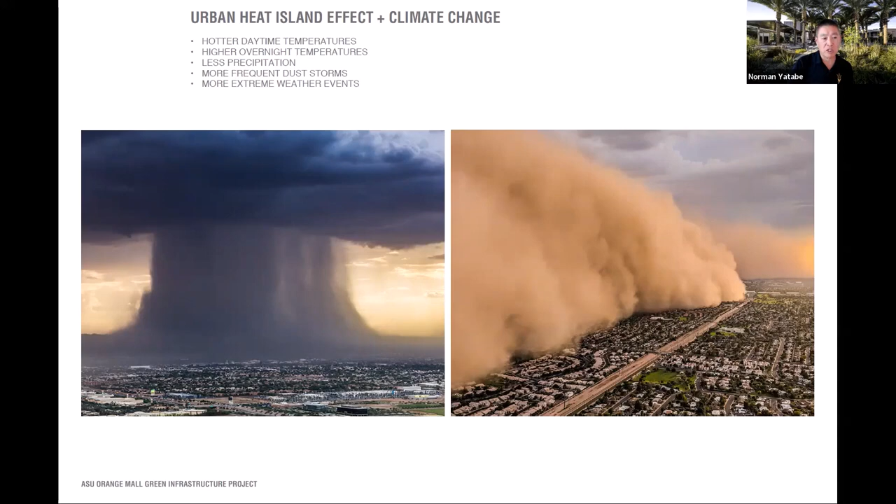So to address the negative impacts of climate change, ASU has committed to leading the world by example and has established a series of sustainability goals, which in essence permeate all aspects of university life. To meet these goals, our approach includes advancing sustainable technology and research, converging the university's mission with its operations, raising awareness of climate change and resource depletion, and learning from the practice of implementation.

And two examples of that are our Campus Harvest program, which addresses our food connection goal.

There's two parts to it. One is the date collections and citrus collections from our on-campus palms and citrus trees. In terms of staff and faculty involvement, we extend participation and interaction by staff, faculty, and students in all aspects. What you're seeing here is our grounds operations and students and staff participating in zero waste events and some of the food harvest collection.

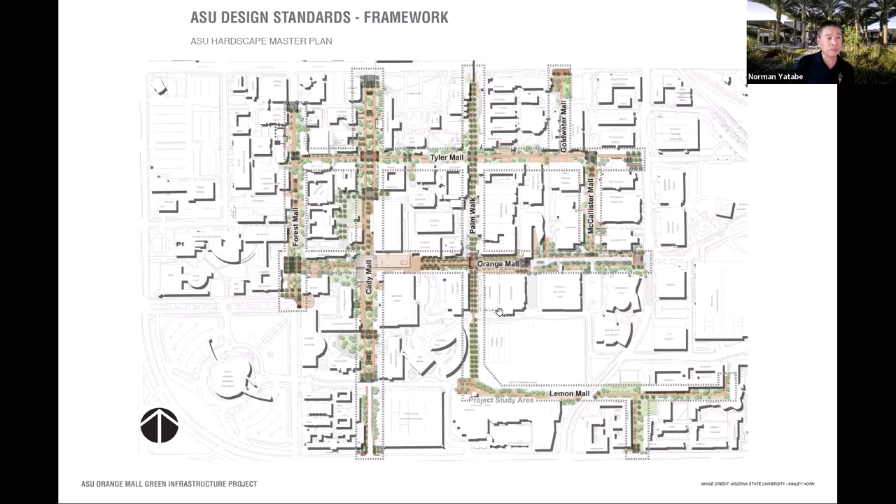In 2016, the Student Pavilion project was created to house all student government and student group activities into one building in the heart of campus. The goal was to achieve LEED Platinum and make it also ASU's first net zero energy building. We also saw this as an opportunity to address the area in front of Student Pavilion. This is just context: middle of campus, Student Pavilion, and Orange Mall.

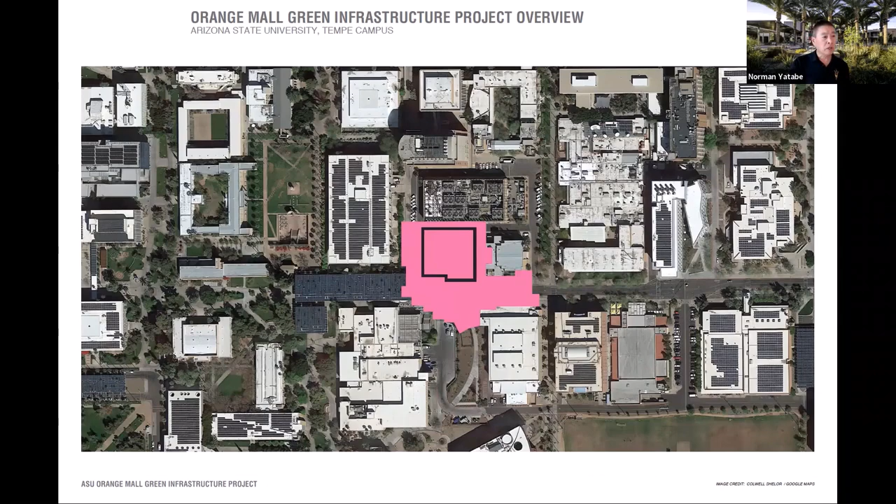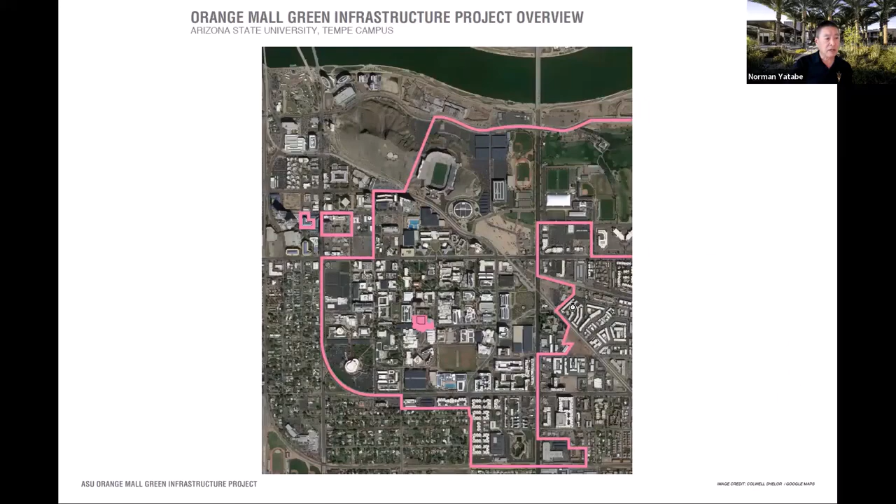We used Orange Mall as the first implementation of our hardscape master plan. We essentially had two projects working in one project area with two different consulting groups. One, the Student Pavilion, was led by Weddle Gilmore as the prime architect, and Orange Mall was led by Allison's group as the prime landscape architect. With that, I'll pass control over to Allison to talk about the project specifically.

All right, thanks Norman. The stakeholder engagement process was really well attended by the students, and the desires for the building and the corresponding outdoor spaces were integral to the development of the larger section of Orange Mall. Over half of the top 20 desires included goals for the outdoor spaces or about the creation of indoor-outdoor spaces that jointly met the goals.

One of the largest challenges of this project was the location, because the site is in the middle of the heart of campus, next to the library, the student union, lecture halls. Around 12,000 students and faculty walk through the site each day. During the hotter times of the month, the pavement can be over 130 degrees Fahrenheit. It's really hot, and there wasn't a lot of shade. As the campus is densifying, a lot of the outdoor spaces are being taken up with larger footprints for the building and taller buildings.

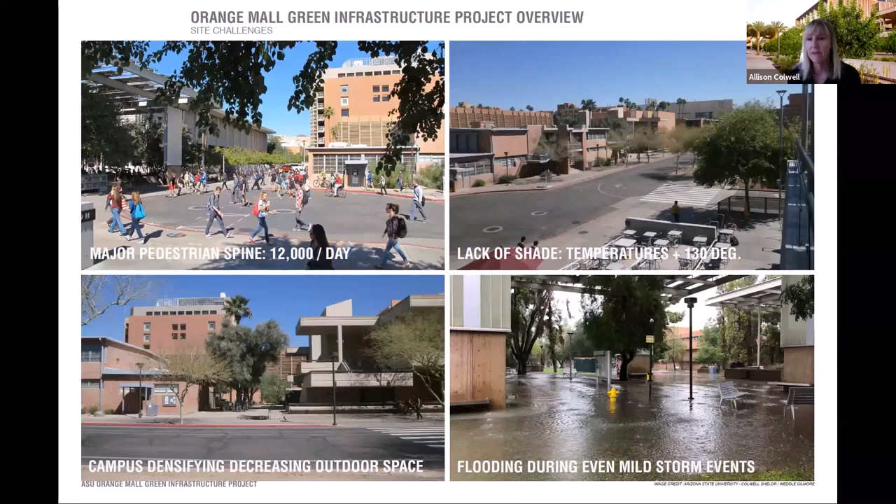Even during just mild flooding or storm events, the buildings around this area would experience flooding. It's interesting that just a couple of storm events each year, the few times that it rains, it really pours, but those couple storms make up that 7.7 inches that Norman was talking about. So there were other challenges to the site: many utilities and really shallow duct banks. We found out very soon that we were going to have challenges getting the water across the site with these shallow utilities.

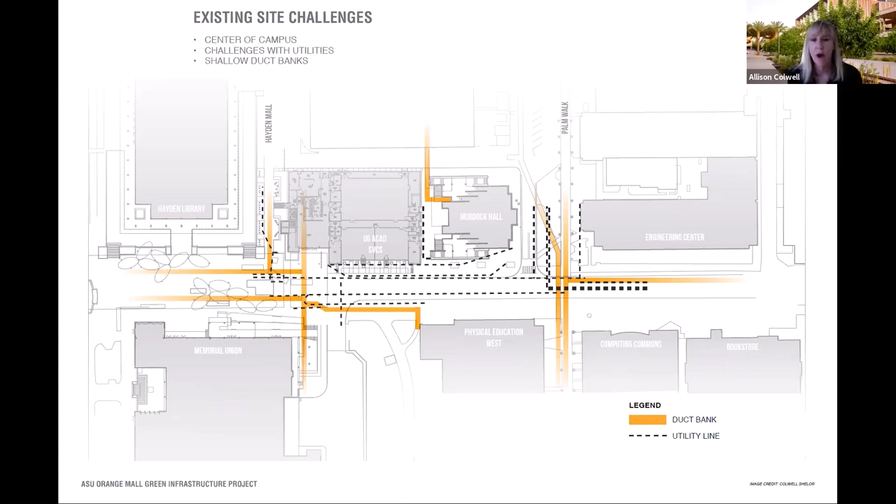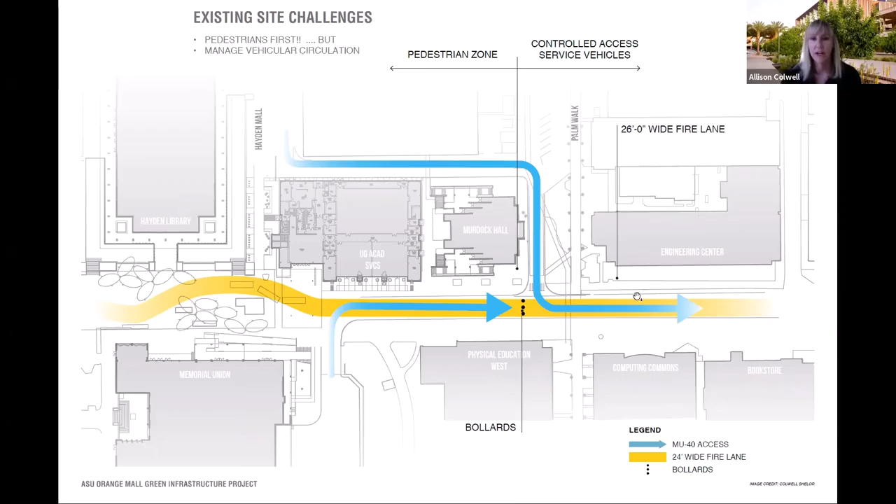The design priority was pedestrians first. However, we needed to accommodate a 24-foot fire lane right through the middle of the site, as well as a loading dock that needed to access through the site for large trucks. The central plant is in this area here, and the trucks needed to kind of get around the building from the central plant.

Taking all of that into consideration, plus the student feedback, the project goals of the landscape were to first prevent flooding in adjacent buildings during our monsoon season, mitigate the microclimate to maximize comfort and use, provide social space to reduce student stress, create flexible event space as a social amenity, create a perceivable educational living laboratory, support ASU's position on global sustainability, and achieve sustainable site certification.

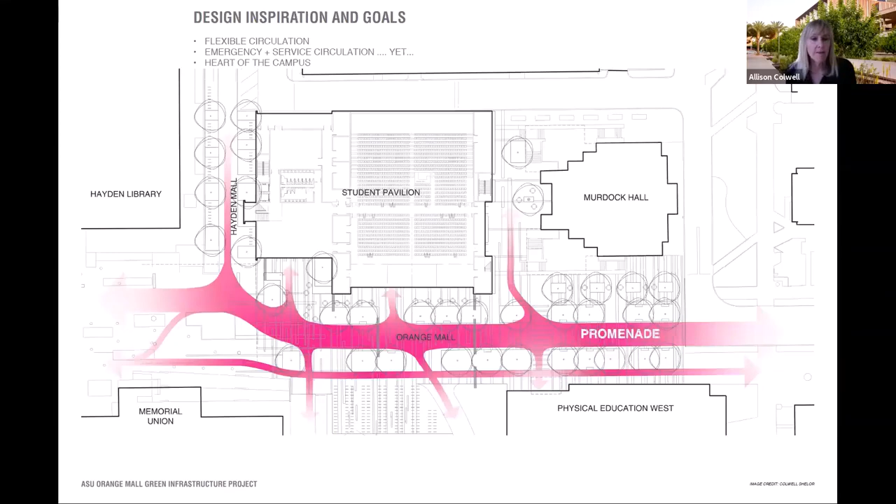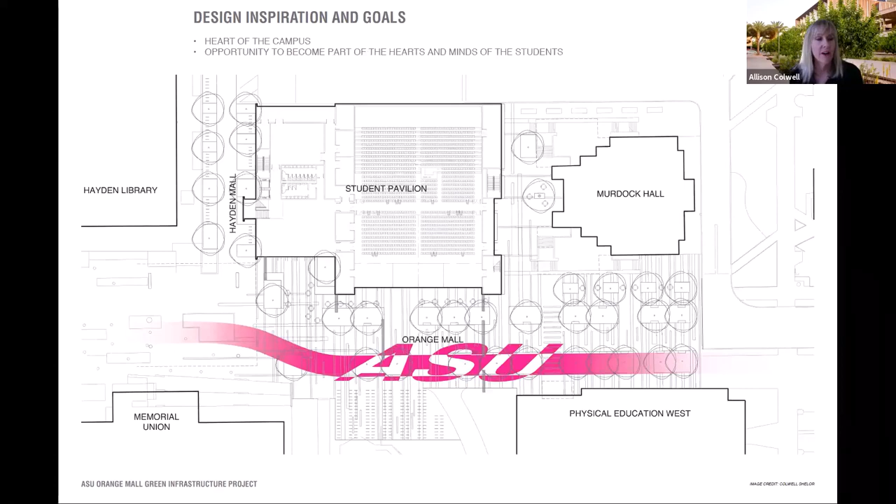By creating a dominant promenade through the site connecting to all the other highly used buildings, we saw an opportunity to create a space that transforms the heart of the campus into a green heart, part of the brand of ASU with living laboratories front and center. The renovation transforms the asphalt paved vehicular roadway into a shady pedestrian mall.

The covered pre-function space for the student pavilion is right here, just showing you a couple of the features. Moving to the east, this is the palm court with perfect dappled shade, and it allows for both programmed and non-programmed activities such as student projects, concerts, protests. Down here at the south is the rain garden, which has seating for a little bit more quiet off the busy thoroughfare for respite. And then the bioswales to the east flank the promenade.

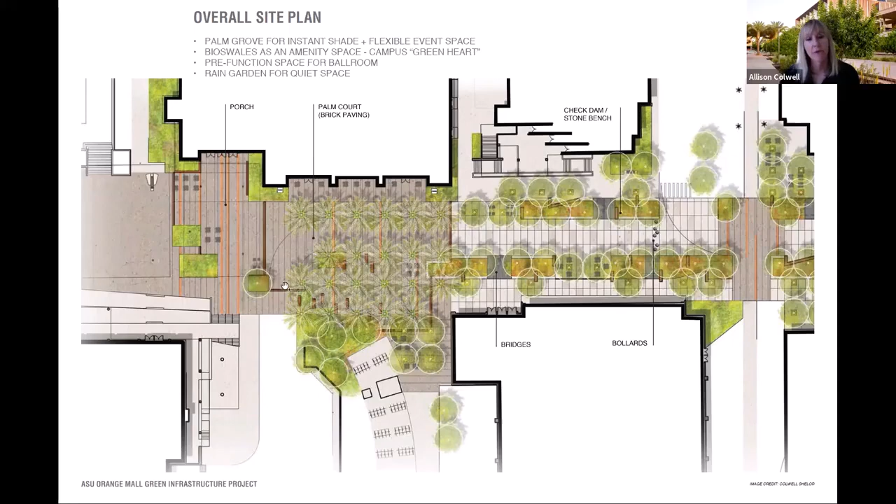They have bridges for access across the site, and then steps down into the bioswales for encouraging access into the gardens. And then the benches act as check dams throughout the site to kind of slow the movement of water. And then one last thing was the roof rainwater is brought down into the scuppers in these two locations, and then they traverse the site via these visible runnels down into the rain garden.

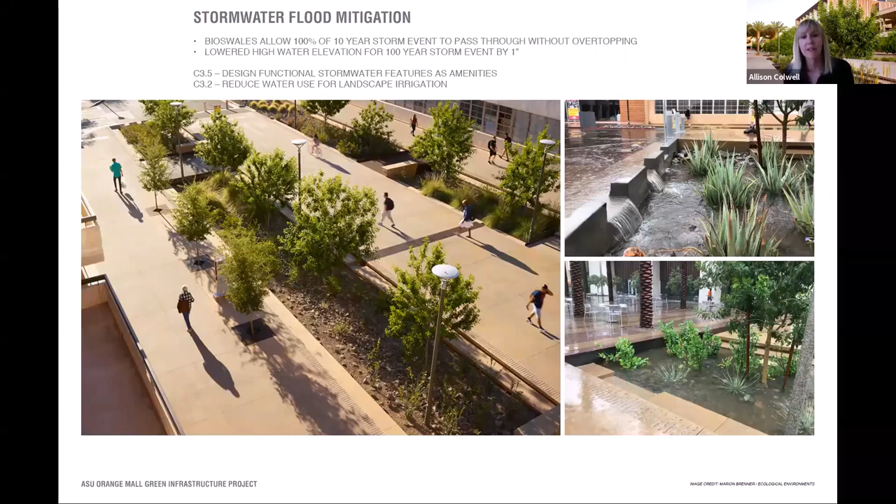And here is an aerial view of the eastern portion of Orange Mall, pretty quickly after it was constructed, as well as a view of it in action. And the same thing here. And the swales allow 100% of a 10-year storm event to pass through without overtopping, and have lowered the high water elevation for a 100-year storm event by 1 inch. So they're working really well.

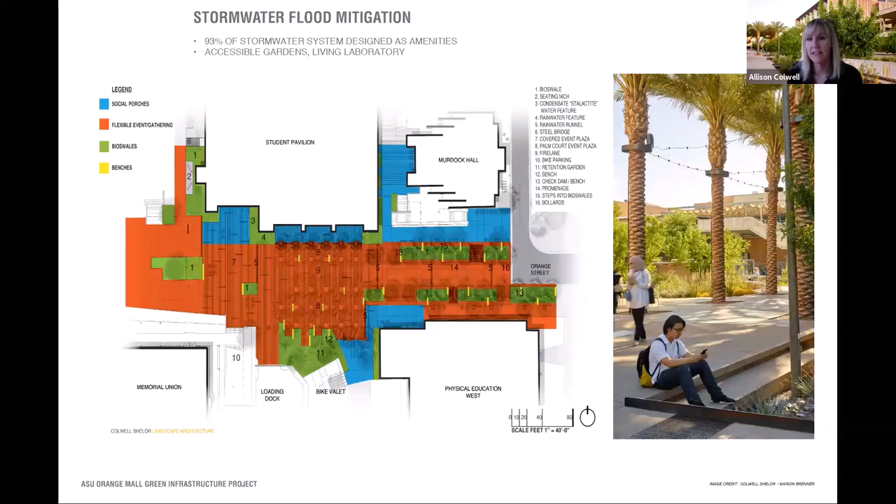The bioswales are designed as an amenity so that the students can access the space both in classes and recreationally. And 93% of the stormwater system was designed as an amenity. This diagram shows the water conveyance system. And basically, I think it's pretty clear, but the north bioswales fill up quickly, and then overflow comes to the south bioswale, and then it comes down to this low point, which is the rain garden. And then the west side of the site kind of has its own series, and anything that is not used in the landscape at this point will overflow to the retention and sports field south project site.

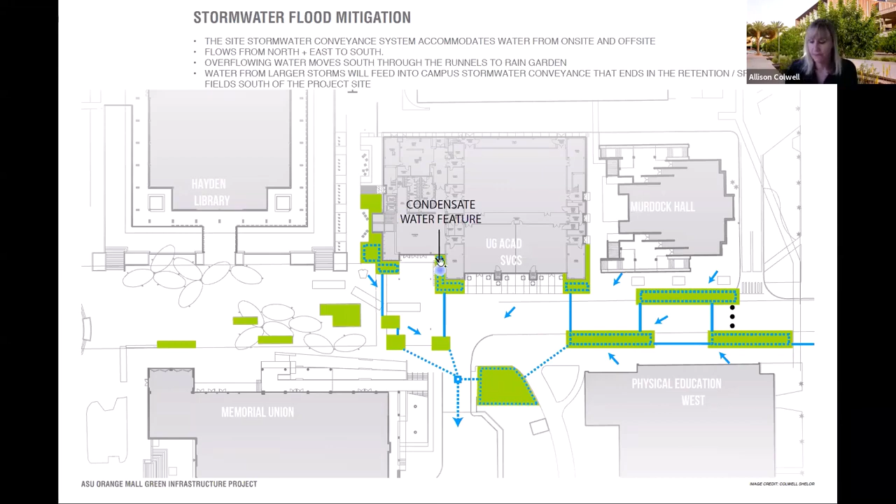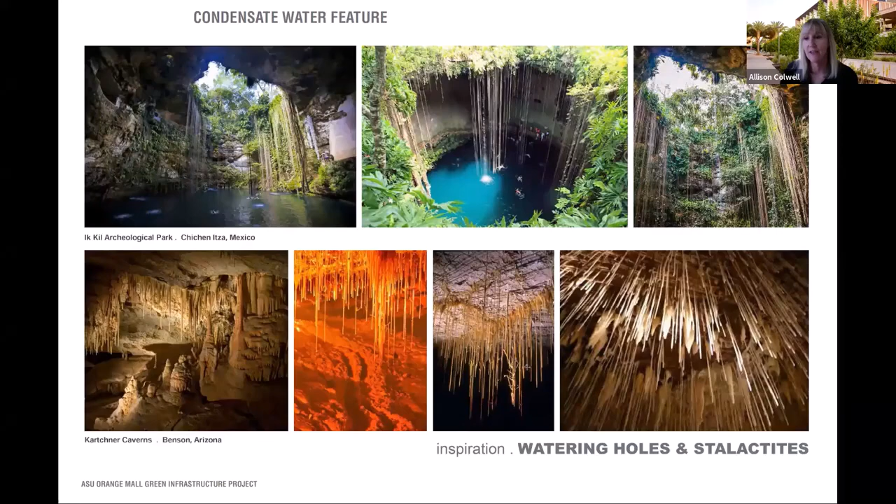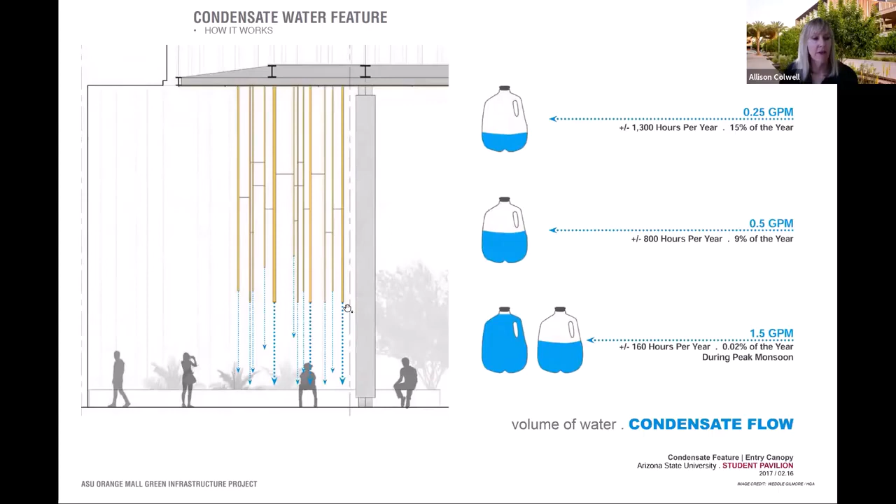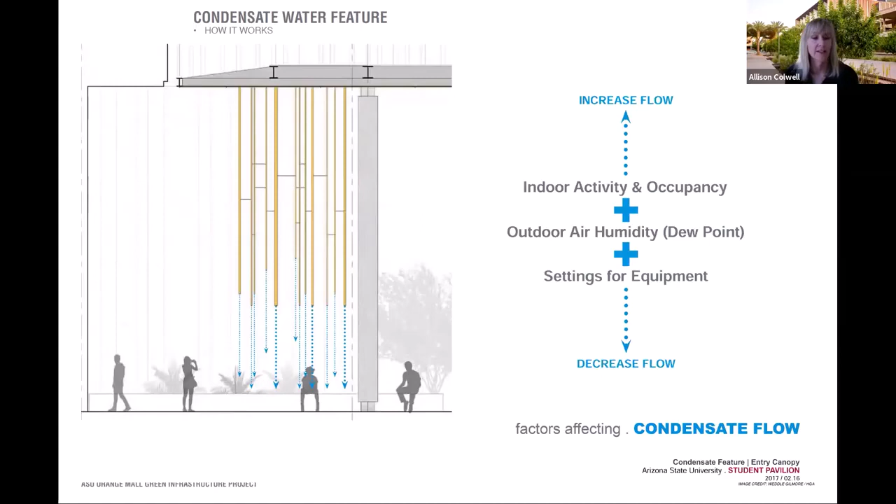So the marine grade brass pipes were designed so that the smaller pipes carry water during times of the year when there is less condensate. And then the larger pipes carry the higher volume, and it usually happens in times with increased flow, where we have higher outdoor air humidity and more indoor activity. And then here is the finished feature, as well as it in action on the far right. So the Palm Grove provides the much needed flexible event space for both day and night use and easily accommodates a high pedestrian volume.

Another key goal was to provide shade on day one. In fact, shade is the most important microclimate element necessary to facilitate social connection. And it's extremely difficult to do in the desert, as our native trees grow very slowly and can take even more than 15 years to create a decent shade canopy. Additionally, the desert trees have very small leaves and they have really low evapotranspiration rates. And so the student pavilion is facing south. It's got glazing here so the ballroom and meeting rooms can connect with the outdoor space.

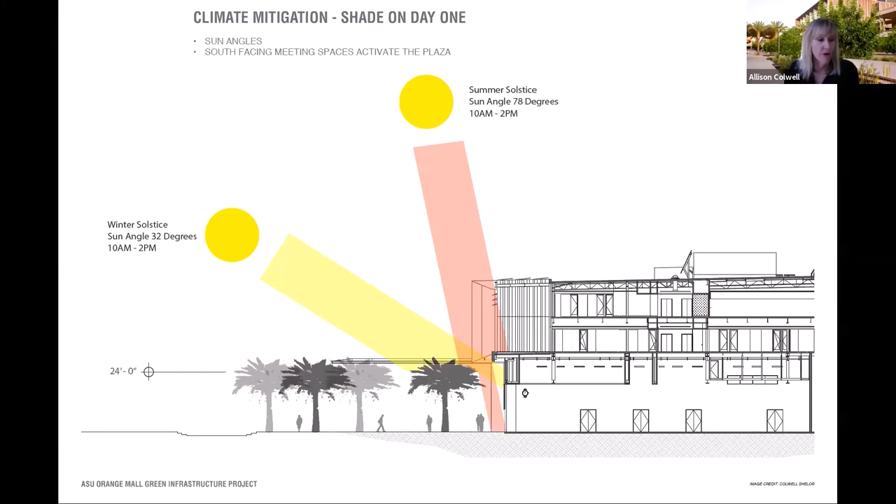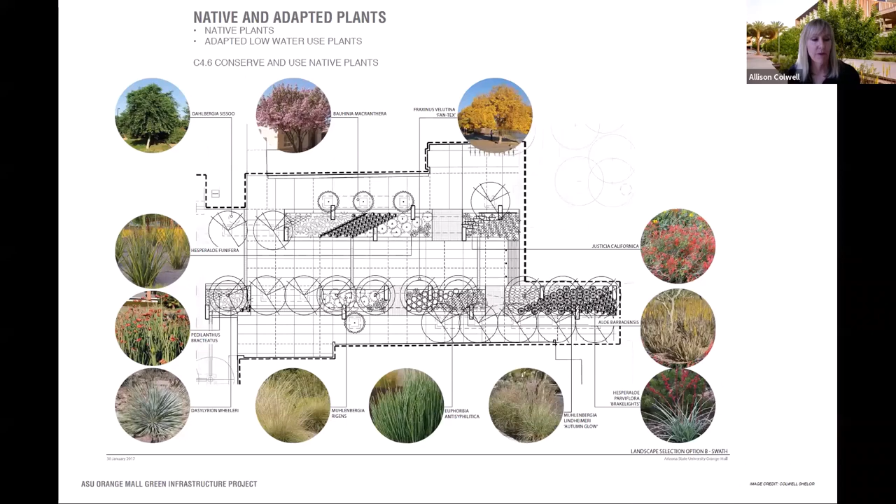The planting consisted of all low water use native or desert adapted species that require very little maintenance. The trees require little pruning as they're kind of on the periphery of the pedestrian walkways, and the grasses and accents require maintenance only once per year. And we were able to more than double the biomass density index from the existing conditions. So it's been great. All right, we're going to transition to Cindy Quinn.

Thank you, Allison. Let's see.

It's not moving forward.

There we go. Since SITES was still new and unfamiliar to the team, I was brought on as a SITES project administrator because of my background as a LEED consultant. Understanding LEED made for a natural transition to learning SITES because the two rating systems are laid out in a similar fashion and are somewhat similar in their submission processes. Also, Sustainable Sites Initiative and USGBC have done a really great job of aligning some of the credits and making SITES and LEED synergies really easy to implement.

The Student Pavilion was registered under LEED version 2009 and was pursuing and eventually earned Platinum certification. This meant that a lot of the credits that shared synergies were being pursued by the LEED project, and we only needed to refer to the LEED project to earn those SITES credits. So for example, the LEED project earned SS credit 2, development density and community connectivity. That meant the SITES project could earn C1.6, locate projects within existing developed areas. And the LEED project earning SS credit 3, brownfield redevelopment, meant that the SITES project could earn C1.5, redevelop degraded sites, and so on. So in all, the SITES project was able to earn 40 out of our 200 points from the shared credits.

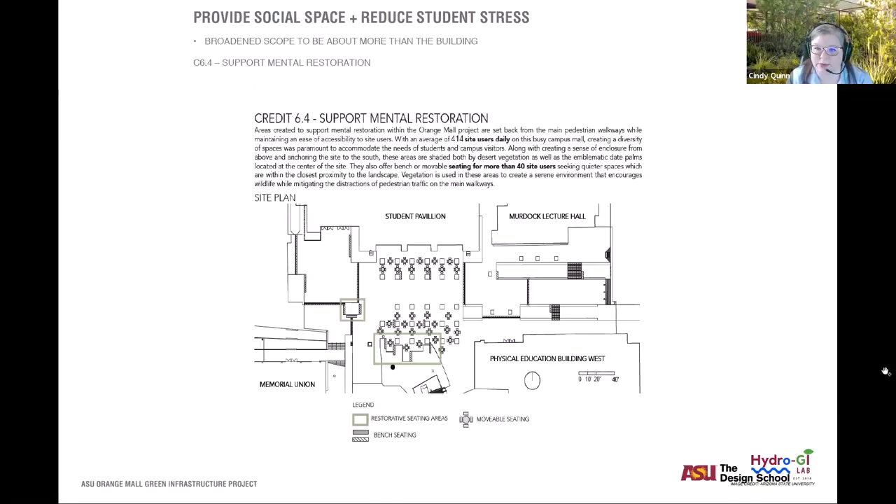One challenge we had in the SITES process was that the LEED project and the SITES project had separate design teams. I wasn't involved in the LEED certification of the Student Pavilion, which presented a challenge in maintaining our SITES scorecard throughout the process. We were at the mercy of the LEED project a little bit. We couldn't really be certain that we would have those 40 points until the Student Pavilion was certified. And on the other side, it could have simplified the Student Pavilion's LEED documentation process had they used the SITES to LEED synergies. So we would recommend having unified design teams for the building and the site.

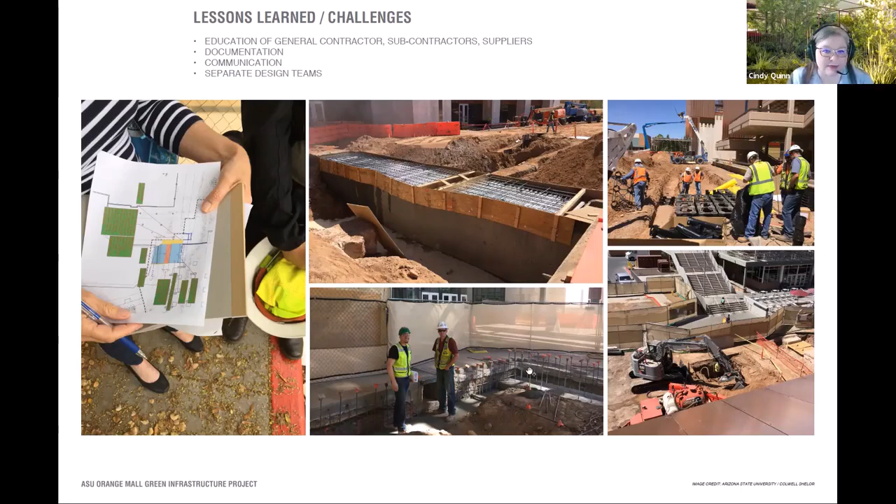One lesson we learned is that it's really important to educate your contractors, subcontractors, and suppliers in sustainable practice and in the documentation needed for the certification process. Even with the pre-construction meetings and site check-in meetings with the contractor, this was very difficult. For the 4 credits listed here, we sent out letters to our manufacturers and suppliers asking them to provide documents such as a corporate sustainability report, chemical assessments, environmental product declarations, and so on. SITES is so new that this documentation is foreign to them and it was nearly impossible to track down. The trades that have been influenced by LEED were the most successful, but still we pretty much got just that LEED data sheet showing recycled content.

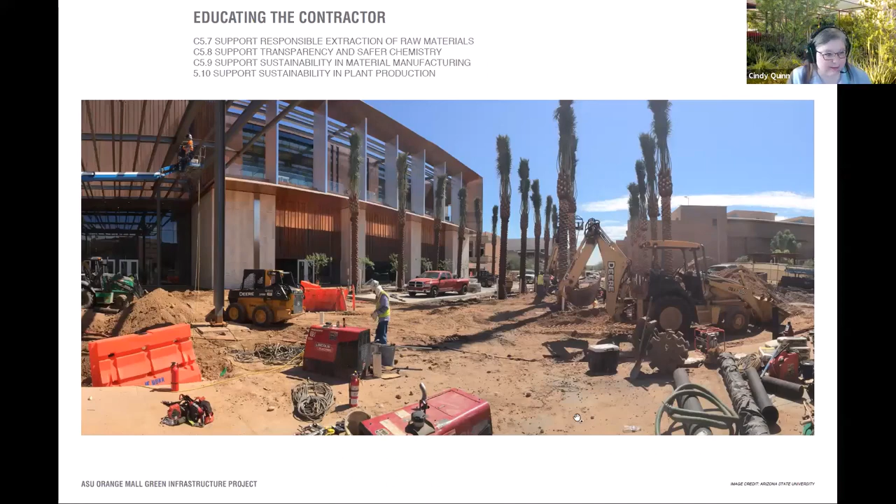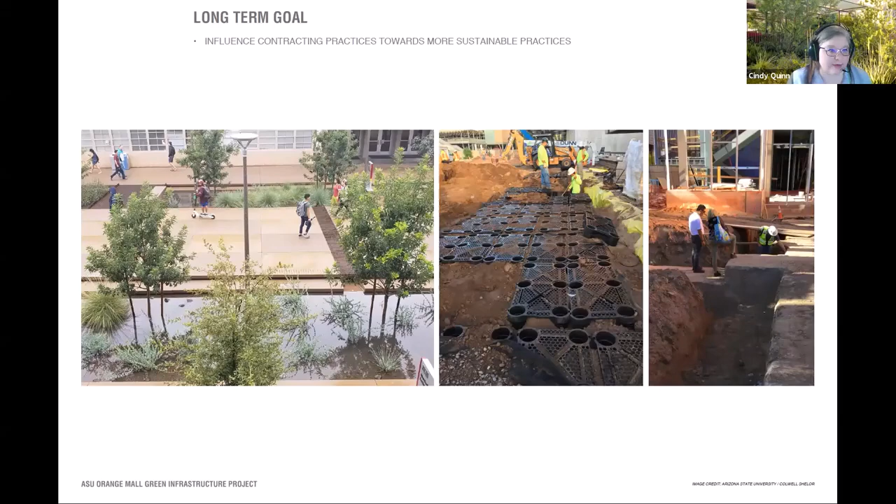So as a long-term goal for ASU, as we continue to work with these repeat vendors, our hope is that those vendors will begin to recognize the importance of sustainability and that they use the SITES process to take a look at their own practices and implement sustainable actions. We also hope that the techniques they learned through this SITES process can be carried forward to their own future projects. One example of that are these Silva Cells. The design team specified the Silva Cell system to allow healthy tree growth under paved surfaces. At first, the contractor had no prior knowledge of the system and it wasn't intuitive to them. They were used to the traditional way of placing trees in over-compacted soils and the occasional use of structural soil in tree pits. But after the product arrived and they had their training, they were really surprised at how easy it was to install.

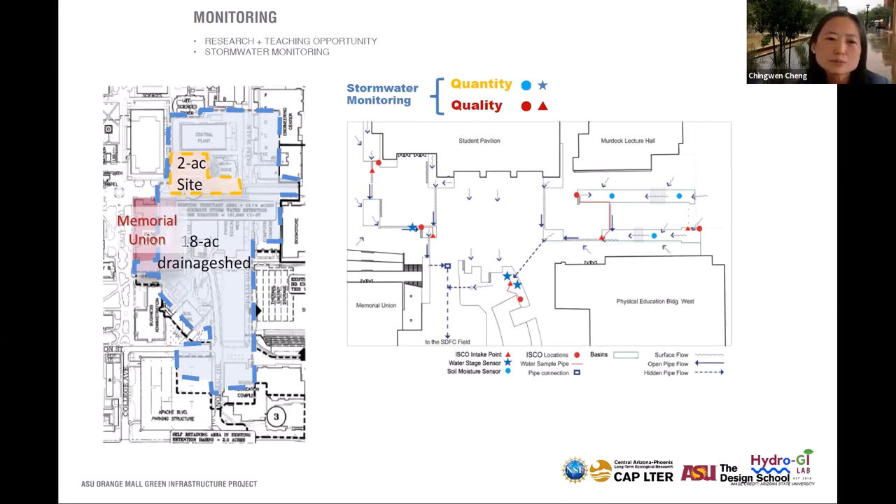It's a blue star. And for water quality, we have the automated water sampling equipment that was stored in the receptacle containers that meet Arizona State University's design standards, which are shown as the red dots. And the red triangles are the input and output points where we collect the samples to compare.

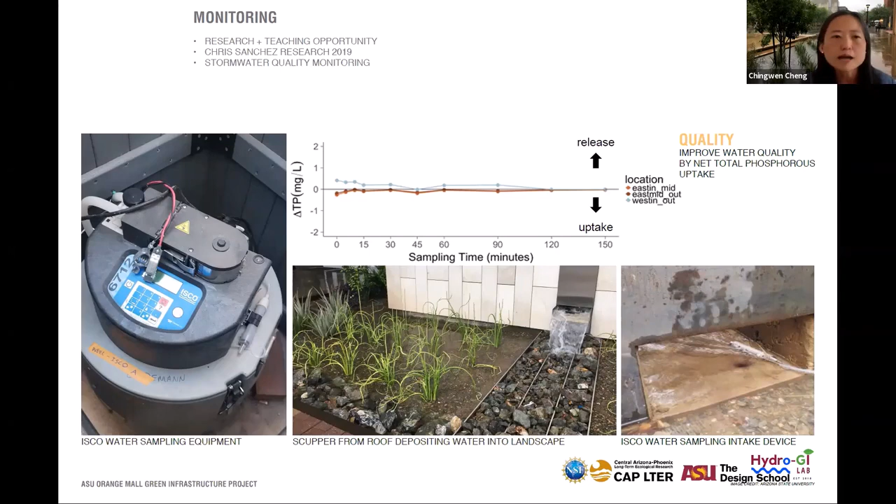So with the combination of soil and plants, we show the evidence. Actually, we were able to retain more than 10-year storm events, up to 25-year storm events, for this design. So I think it is great evidence to illustrate how the bioswales and plants and soil have the effect to mitigate stormwater runoff.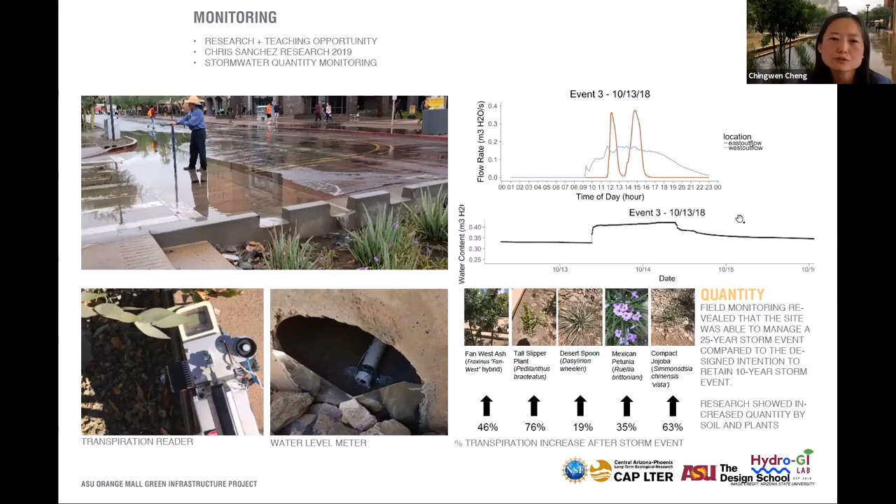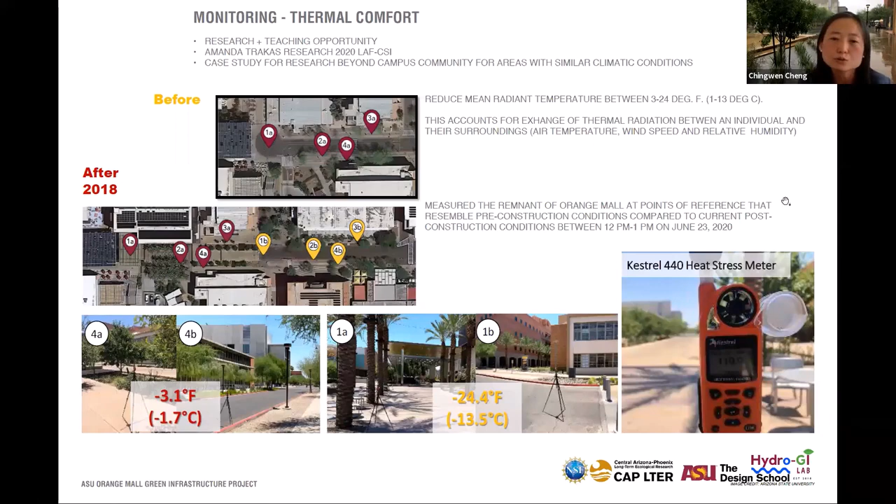And for social benefits and health benefits, we integrate with classes, teaching and research opportunities to have students do their observations, and we have graduate students analyze the data to show the locations and durations where and when the students spend their time on the site, and we categorize from mental restoration and social interaction based on the site criteria. So again, we are able to show evidence that the students do take advantage of these beautifully designed landscapes, and that can help to improve their stress removal and increase social interactions.

And as Cindy mentioned, this site did provide multiple opportunities for education and outreach, and we were able to engage graduate students and undergrad students to do research as part of their theses. And we are able to provide classes and tours as well, and engage more than 500 students so far to tour and understand the site. And we are also able to show it to outside communities such as the Maricopa County Flood Control District and a charter school in Phoenix, the Pavilion Academy, and both of them actually showed interest in getting SITES certification on their campus.

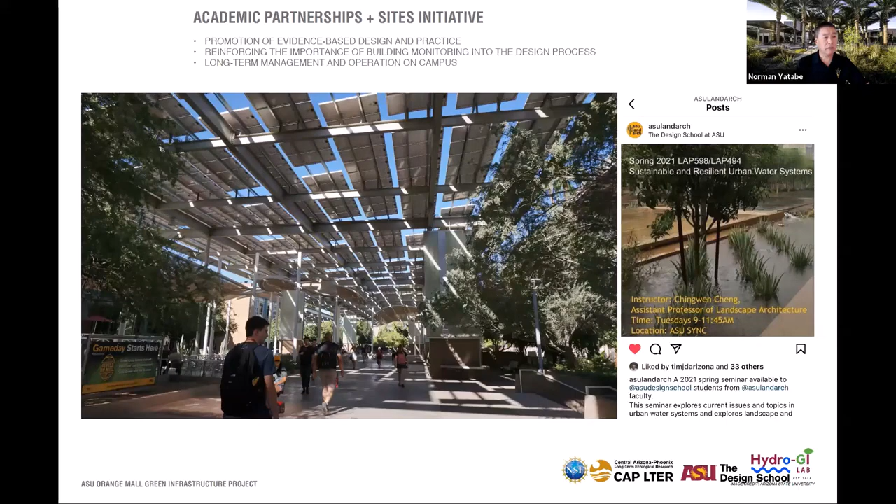So I really just want to say that we are all extremely happy with how this project has turned out, and we are very honored, as said earlier, to have achieved gold level certification. For ASU, this really, as Chingwen said, has been a great experience in terms of involving different groups within ASU, from our academic side, our operations side, and our planning, design, and implementation side as well.

Moving forward, ASU has committed to incorporating sustainable site certification as part of future projects when it makes sense and when we have the right scale and composition of project. And to that end, we have a second sustainable sites project in the works. This is over at our Nelson Fine Arts and Music School area. And this is another project that we are really looking forward to getting site certified through GBCI.